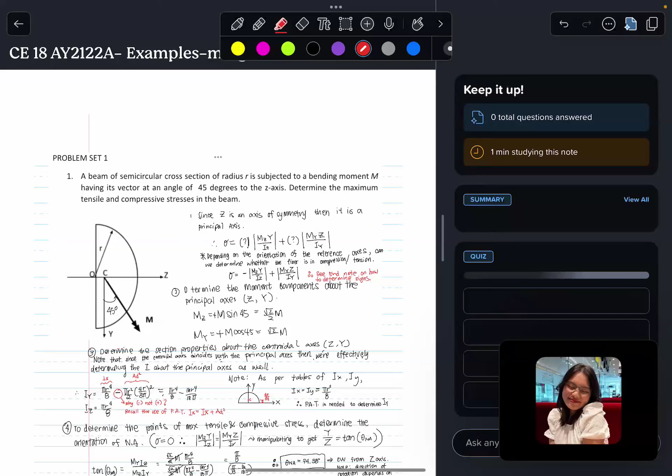What I have here are sets of problems, taken from previous exams and previous problem sets. So let's get started. Yung coverage ng ating long exam involves special topics on flexure, anything that involves bending moment and shear forces—kung paano siya mag-manifest into bending stresses, paano siya mag-manifest into shear stresses. Marami-raming problem ito, let's get straight to it.

For the very first problem, imagine that you have a semicircular cross-section with radius r. Take note, radius r ito, hindi pa natin alam kung ano ba yung radius na ito, so very expression-heavy yung ating magiging exercise dito. Sinabi daw na it is subjected to a bending moment having a vector angle at an angle of 45 degrees with respect to the z-axis. So determine the maximum tensile and compressive stress of the beam.

Kindly look at this, check natin very precisely kung ano yung ating coordinate system dito. Meron tayong y-axis dito and z-axis dito. Kung gagamitin natin yung right-hand rule, yung y being our abscissa, yung z being our ordinate. Kapag kinross mo itong dalawa, y cross z, yung positive x na vector normal to the plane is going away from the page, parang pointing towards you.

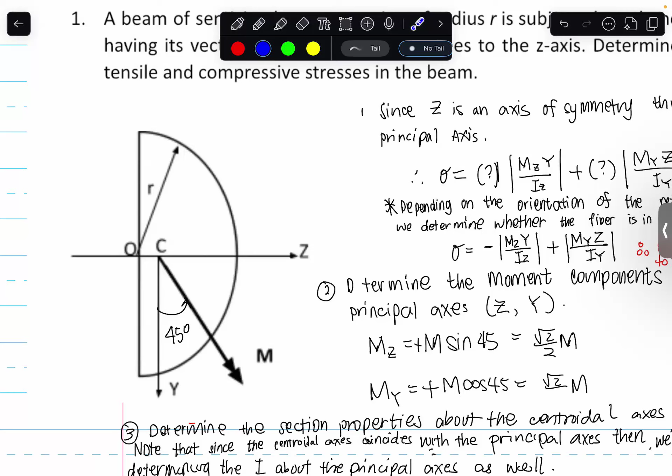Ibig sabihin, yung makukuha nating anything na positive na value would indicate tensile na bending stress siya. Kapag baliktad naman, say ito yung z, ito yung y, magfi-flip yung ating perspective such that yung vector normal to the plane is into the page. Therefore, whatever bending stresses na makuha natin, magfi-flip dapat yung sign, kasi baliktad yung notion ng positive at negative—given na kunwari ito si z, ito si y, going towards the page yung positive na direction. Pero other than that, mabilis lang naman natin itong ma-carry over, hindi naman very particular sa signs ng bending stresses natin. Anyhow, let's deal with the problem.

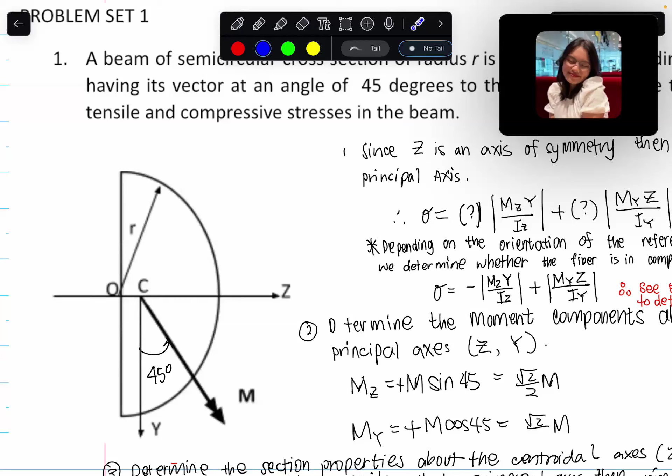So we have a semicircle right here. Magiging concern natin, paano natin makukuha yung IY saka yung IZ, tas should we be getting yung IYZ? Yun yung tatlong questions natin bago tayo deal with unsymmetrical na bending stresses. Pero lucky for us, since z-axis is the axis of symmetry, automatic principal axis na agad siya. So hindi na natin gagamitin yung product of inertia, simply gagamitin natin yung principal moment of inertia along Z, principal moment of inertia along Y.

Again, these are the coordinates ng principal axis—kapag capital letter Y, capital letter Z, kapag capital letter yung subscript, ibig sabihin these are along your principal plane. So depending on the orientation of the reference axis, we determine whether the fiber is in compression or in tension, kailangan lang nating i-check.

Again, yung notion dito is that yung going away from the page, towards us, yun yung positive na bending stress. Paano natin makukuha yung positive na bending stress? Say meron kang moment along Y. Paano tayo arriving at that moment along Y? Kung may moment ka along Y, that is a result of some radial arm along the z-axis.

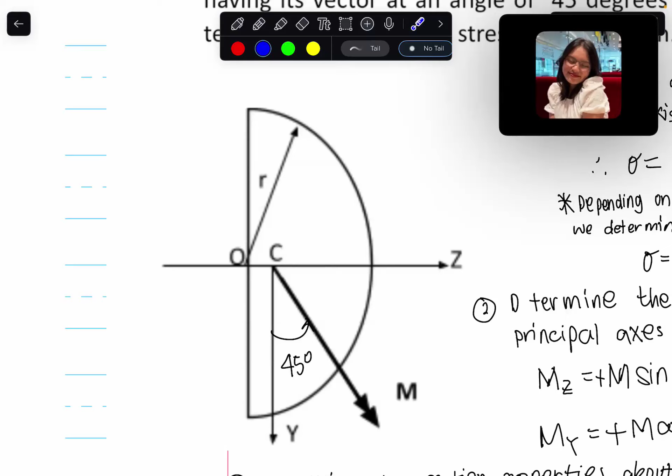Ito yung mahirap kapag online, hindi ma-demonstrate si right hand rule, pero yung right hand rule natin will kinda look like that. Kailangan natin mapakita na if going away from the page, tension siya; if going towards the page, dapat in compression siya. So kailangan nating i-take note, halimbawa going into the page yung direction ng bending stress mo, meron kang moment arm dyan—kindly check yung right hand rule natin. If going towards the page, ito yung moment arm mo, assuming negative yung bending stress going towards the page, yung moment arm mo magiging resultant niya ay yung moment na pagganito.

So that would indicate a negative bending moment, when going away from the page, and you'll have this moment arm right here based on your right hand rule. Lay down your palm along this axis, then raise your fingers on this plane along the positive z-axis. So anything going towards the positive z-axis, when you raise your hand, that becomes your moment arm, then your thumb should be pointing towards the positive y-axis. That would indicate that if you have a positive component along Y of the bending moment, and your moment arm is along the positive Z, you'll have a positive bending stress.

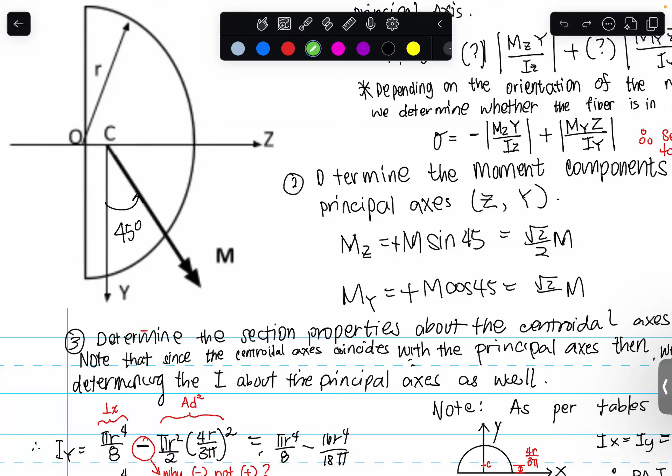Now, another thing, the component along the Z for the bending moment. Say you have a component along Z for the bending moment, like this. Imagine this is your radial arm along this line, but we focus on the positive y-axis. This is your moment arm, lay down the tips of your fingers here. Then try to curl up your hand from that page, your right hand. What you'll realize is the arrow is pointing towards the negative z-axis. So that would indicate that the connotation is negative for m sub z, given that y is positive and z is positive. This combination would result in a negative bending stress.

So that's how you check whether the bending stress is positive or negative, because it will matter when you add these together.

So after determining our equation, you can then decompose it into its component along the principal z-axis. So what you'll have is, if it's 45 degrees from the y-axis, which is your abscissa, to get the component along y, we need the cosine. For the component along z, or the ordinate, we need the sine trigonometric function. So to complete it, this is square root of 2 over 2 m, square root of 2 over 2 m. Both components are positive.

Now, the challenging part is determining our section properties about the centroidal axis. What we have is the formula for the moment of inertia for a semicircle. And here is that formula: pi r raised to 4 over 8.

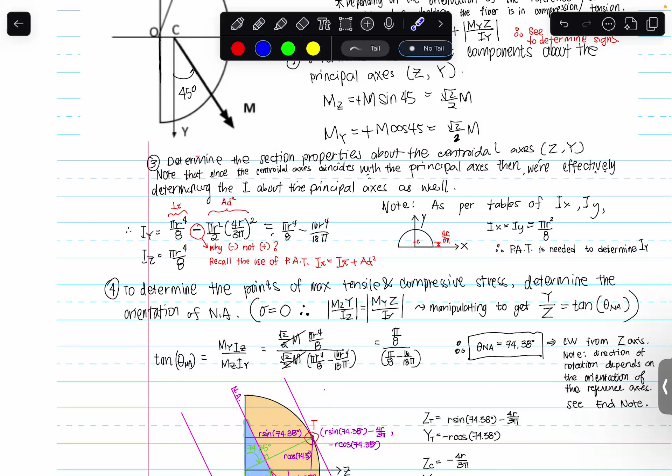So yun yung next natin na SOP. Kung provided na yung ating bending moments, provided na yung ating product of inertia and moments of inertia, you can determine kung saan si neutral axis. Pero lucky for us nga, walang product of inertia.

So we can satisfy ourselves with this formula right here. So meron kang tan of the angle of the neutral axis. Tapos meron kang MYIZ over MZIY. So ano ang meaning nito?

So take note na this is Y over Z. Balikan lang natin. This is Y over Z. So whatever angle na madederive natin dito, it will always be with respect to from z-axis going towards the y-axis if in case na positive siya. Pero if negative siya, ibig sabihin it's going away from the y-axis, yung direction ng angle mo.

So kindly check lang, makukuha natin, plug in lang natin. So meron kang value for my, which is this one right here, for mz, this one right here. So magka-cancel out lang yan. So wala tayong problema. Tapos yung hina-highlight ko rin na r raised to 4.

R raised to 4 yung common factor ng lahat. So pwede mong i-factor out lahat yan. So yung matitira is pi over 8, tas pi over 8 minus 16 over 18 pi. And this will give us, kapag pinlagi natin sa calculator, 74.38.

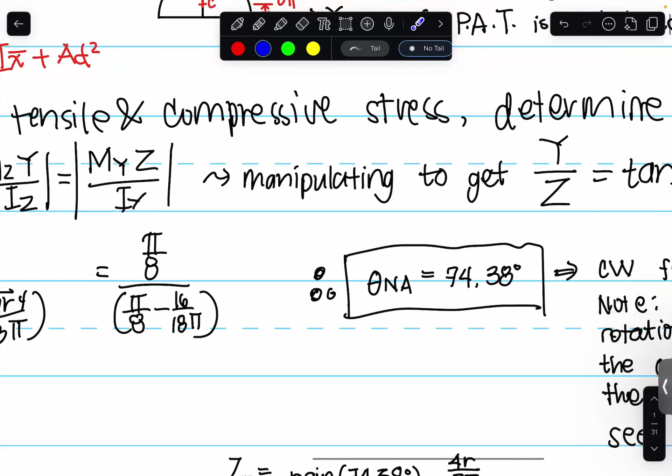So again, yung base kasi sa pagkakasulat natin ng ating equation for the neutral axis, kindly take note na dito siya galing. So meron kang mz over iz

is y, tapos meron kang my over iy times z right here. So kapag ginumble mo yan, you get yung y over z. So yung my, imumultiply mo sa iz, tas yung mz, imumultiply mo sa iy. So kapag kinuha mo yung y over z, you'll be having this equation right here.

So meron ka nito. So again, from z going towards y, if in case na positive yung angle natin. Pero nag-highlight din na bakit clockwise? Nagmukhang clockwise, kasi since si z yung kinonsider natin abscissa dito. Si z yung kinonsider natin abscissa, which is yung denominator. Tapos yung y yung kinonsider natin ordinate, which is this one right here.

So, ibig sabihin lang nun, z cross y, this will give us negative x. So kahit na positive yung makuha mong value rito, that would indicate a clockwise na rotation. So, that's another way to go around this.

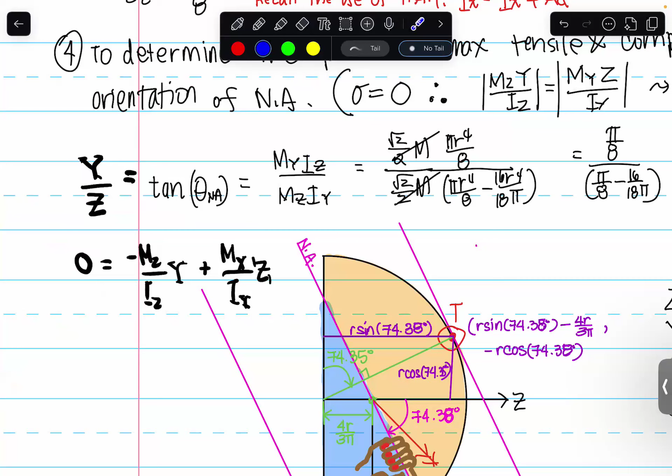So, para lang hindi talaga magkalituhan, if na-encounter nyo itong numerator at saka denominator na term, pa-positive na term from the denominator na axis towards the numerator na axis. Kapag negative, going away from the numerator axis from the denominator axis natin.

So meron tayo ito, 74.38. So again, from the positive z, so ito yung centroid natin, ito yung centroidal axis natin. So from the positive z going towards the positive y, so we have this angle right here. So ito yung ating neutral axis.

After determining yung neutral axis, it's time for us to visually appreciate siguro kung saan ba possible, saan ba yung mga pinakamalalayong fibers natin. So, saan yung pinakamalalayong fibers natin? All you need to do is, kung maganda yung ating drawing, to draw perpendicular lines. Imagine perpendicular lines, imagine now kung saan pinakamalalayo yung ating mga points.

And this is a bit of geometry na part. So, kung may 74.38 ka dyan, tapos we're drawing perpendicular lines. So, meron kang 74.38 dito. Nag-draw ka ng ganyan, that will be perpendicular to this axis. Yun yung sure tayo.

So, kapag nag-draw ka ng 74.38 from the center ng ating quarter circle, perpendicularly siya mag-intersect dun sa neutral axis natin, and you'll arrive at the farthermost fiber. So, through some algebra, on the other hand, ito for sure, ito yung farthermost na compressive fiber natin. All we need to do now is to get yung z at saka yung y coordinates. Since nakuha mo na 74.35 to, so this must be yung z component, kailangan mo kunin yung sine.

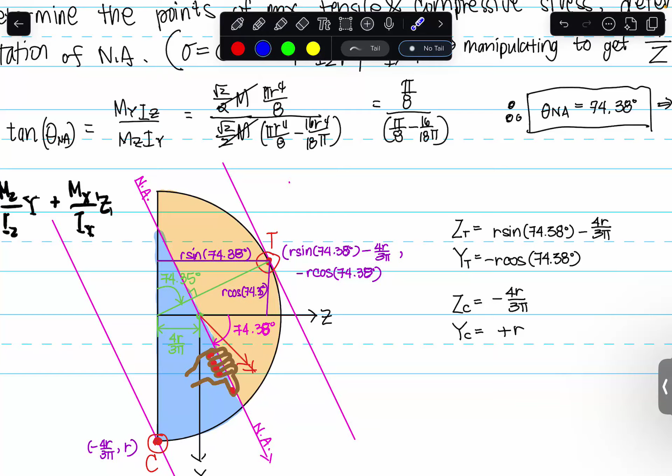Plugging everything in, it's very expression-heavy, so just plug it in as is. You can factor out the r here, including r raised to 4, so they cancel out, leaving r raised to 3. This term vanishes, and m is maintained. This has some value, and this also has some value, so what you factor out is m over r raised to 3, and you get 39.55 mr raised to 3.

On the other hand, if we try it for the compressive fiber, again plug in as is, retaining the signs — don't forget the signs. Again, m over r raised to 3 is the term we factor out. This term vanishes, and what you'll have is negative 4.535 mr raised to 3. So we're done with that.

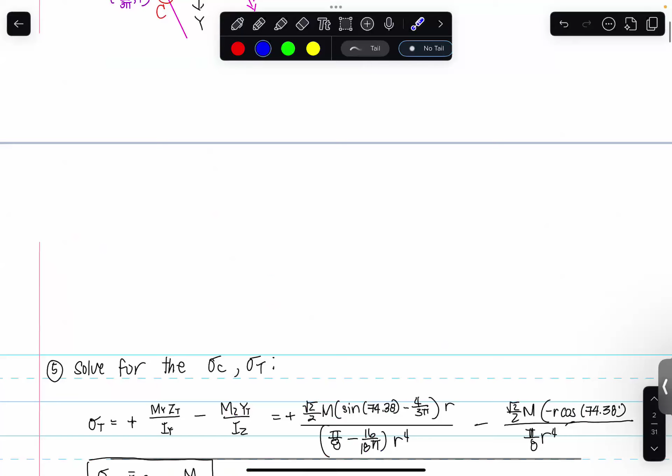That was when the centroidal moment of inertia is involved. But we can also go back to using our original reference axis. So again, this is our reference axis. If we try this using the biaxial bending formula—

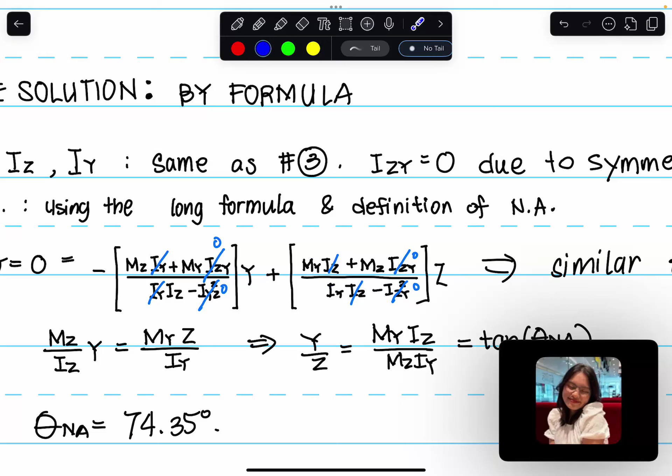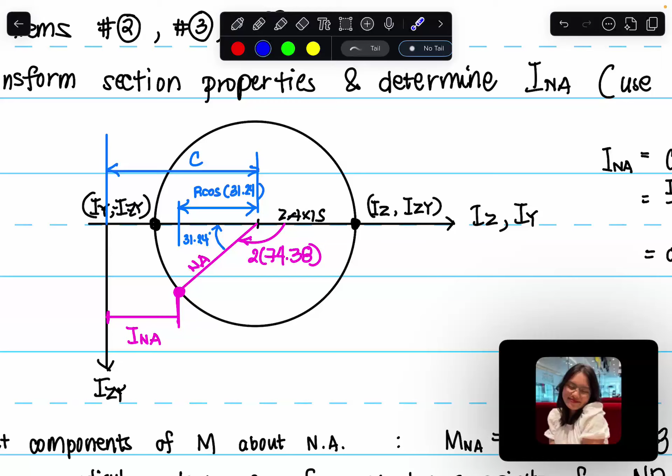So if we want to get the neutral axis, if we do it in terms of components it gets a bit messy, but you'll still arrive at the same point. What we did here was convert from our set of principal moments of inertia into terms of coordinates along the neutral axis.

What we took in particular is what's called I NA — the I along the neutral axis. Then you just take the components along the NA, so we have M cosine of 74.38 minus 45 degrees. That's the component along the neutral axis.

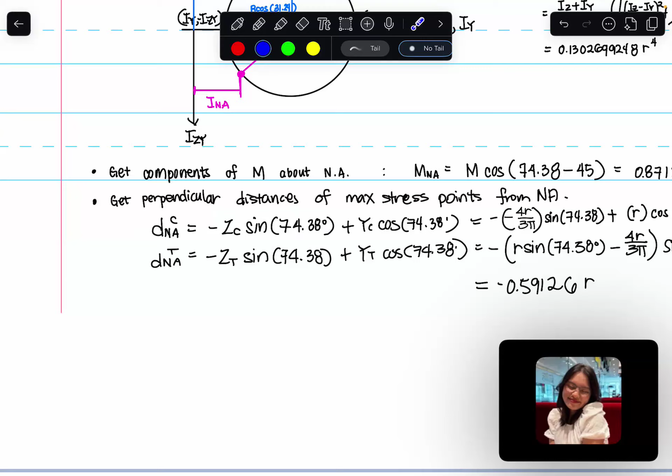So what you do next is convert what the distance from the neutral axis is for the farthest fiber under compression — this is our transformation equation. We just converted our coordinates from this into this, in terms of this. This one, we applied coordinate transformation.

So you end up with this: z sub c times — this is our z multiplied by sine, plus y times cosine. Similarly, we do the same thing for the tension side.

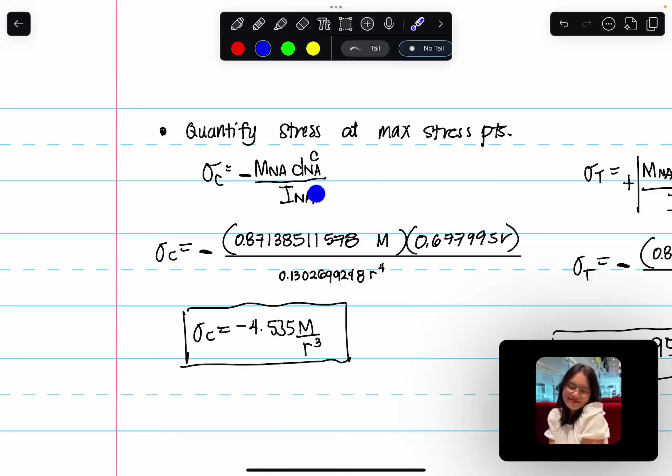So, plugging everything in. So, meron ka nito, tapos meron ka nito. I-plug in mo lang sa M over I NA. So ito yung makukuha mo. My, ito yung M, ito yung Y over I and A. Ito yung M, ito yung Y, ito yung I NA natin. Plug in mo lang lahat. Supposedly, it will loop back to whatever you are getting from the original axis.

Pero again, nakita nyo na ang daming variety ng method na pwedeng gawin, via the principal axis, o pwede mong gawin sa original na axis natin, o pwede mo rin gawin using yung coordinates along the neutral axis. So i-convert mo lang everything in terms of the neutral axis and you'll still get the same set of answers. May questions ba dito?

Questions? Question? Going once? Going twice? Yep.

Yep, ask mo. Ano yung tanong doon sa symmetry? Yung sa symmetry, as long as yung isa sa axis mo, halimbawa yung x-axis mo or yung y-axis mo, is an axis of symmetry, automatic, yung product of inertia ay equal to 0.

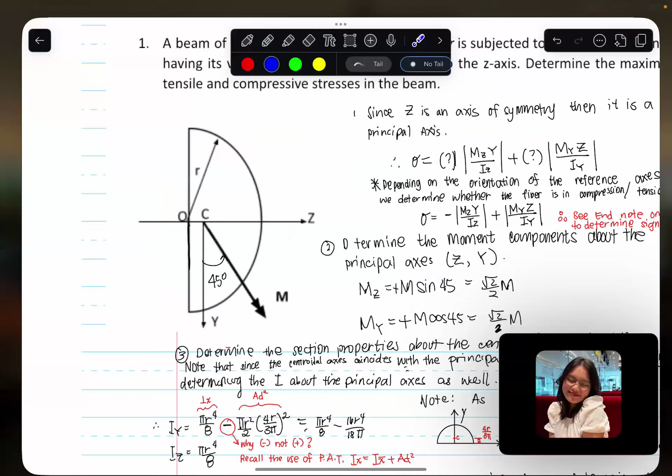Or, another thing, if not very apparent yung ating axis of symmetry, kasi dito very apparent kaya ang bilis hanapan. Kailangan mong kunin yung principal plane, and only if you determine yung principal plane, will you find that particular plane, kahit na hindi siya mukhang axis of symmetry, kung saan nagzi-zero yung iyong product of inertia.

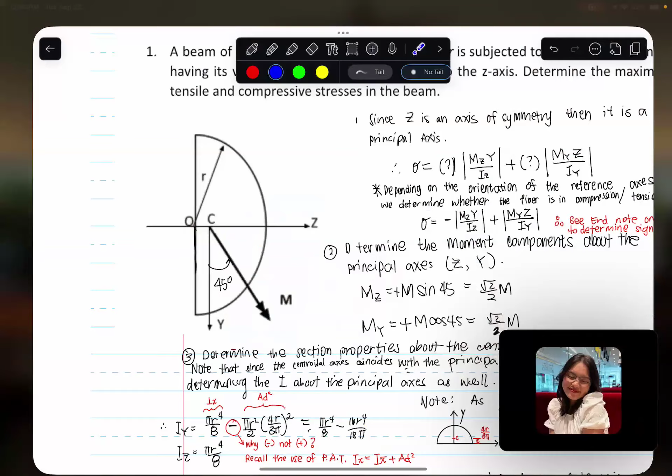Okay, so I hope makakapa natin to just right before the exam. Kasi nung chinek ko, madali lang naman yung part, medyo kaya naman to, mamamanage nyo yung lalabas sa exam, as long as kabisado nyo yung bawat step, even yung pagkuha ng product of inertia.

So para ma-practice pa tayo sa product of inertia. Wala nang tanong? Okay? Ay okay. Thank you, Ashley.

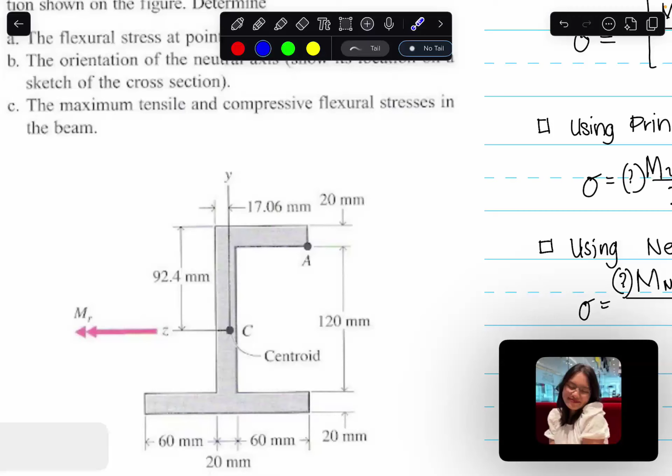So meron tayong beam. Yung beam natin, obviously, very unsymmetrical siya, so walang axis of symmetry. So mahirapan tayo sa pagkuha, bago tayo makakuha ng bending stresses, kailangan natin makuha si... mag-admit lang tayo, kailangan natin makuha si moment of inertia at saka si product of inertia.

So sabi daw, kung meron kang moment, just given yung magnitude na 20 kilonewton meters, pinapakuha sa atin yung flexural stress at point A. So medyo mahaba-haba na journey to, at least, pero makikita natin yung sequence on how we are dealing with the solution.

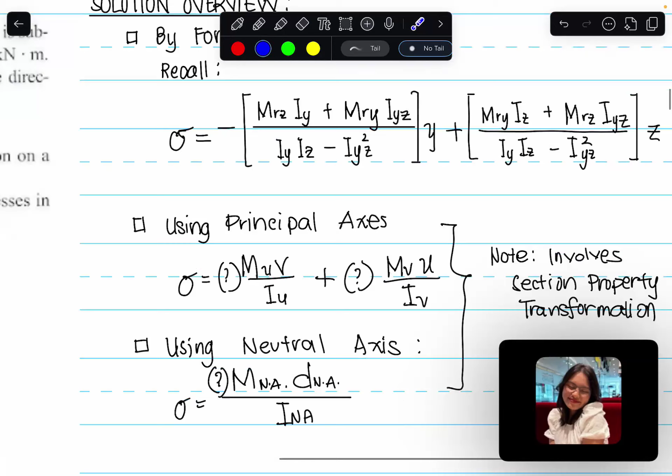So to recall, ito yung formula na gagamitin natin in the end. Provided yung ating bending moment broken down into its orthogonal, so along the y and along the z, then kailangan din natin si IY, si IYZ, at saka si IZ para makumpleto natin to along with the coordinates. And alternatively, natutunan natin just right now, kung principal axis, pwedeng ito, o kung neutral axis, pwedeng diretso na doon.

Look lang. So kung gagawin natin via formula, kailangan natin ma-determine yung cross-section properties, kailangan natin makuha yung moment components, makuha yung coordinates. Lahat yon para dito. Plug and play, makukuha natin siya. So kailangan nating makuha yung section properties.

Imagine that you then broke down yung ating cross-section into these three shapes. You have a red na rectangular shape na 20 by 80 millimeter. So again, kaya 80, 60, at saka 20. So 20 by 80. Tapos meron ka pang 120, so ito na yung hinighlight ng dimension line by 20 millimeter. Tapos meron kang 20, yung kapal, tapos meron kang 60 plus 20 plus 60, 140 millimeter.

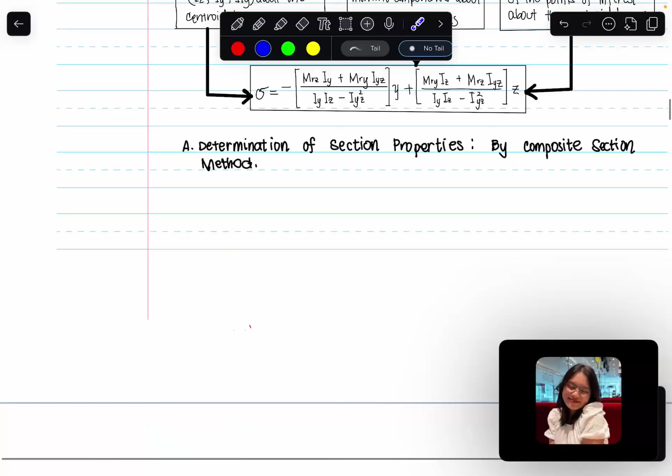So ito yung tatlo mong area. And maganda, para hindi tayo magkaligawan, kailangan natin gawin itong table na to. At kadalasan, hindi na tayo pinapahirapan na pinapahanap pa kung nasan yung centroid natin. So yung centroid provided na, scroll ko lang pataas para maano natin. Provided na yung location ng centroid na 92.4 millimeters from the extreme top, yung top na fiber natin.

And yung location naman niya along, yung centroid naman niya along the z-axis ay located 17.06 millimeters from this fiber right here. So alam na natin, na-set up na natin yung coordinates. Alam mo na rin yung location ng centroid. We can then determine ano yung kailangan mong i-translate from each of the respective shape in order to get to the centroid.

So meron kang DZ, na kung ito yung reference axis natin, so kalahati ng 80 ay 40. Yung 40 na to, ima-minus natin sa 17.06. Tapos yung DY naman natin, ito ay located, so meron kang 92.4 dito. So ibabawas mo lang, kasi since ito yung reference, ibabawas mo lang yung kalahati nito, kasi ito yung location ng centroid niya along the y-axis.

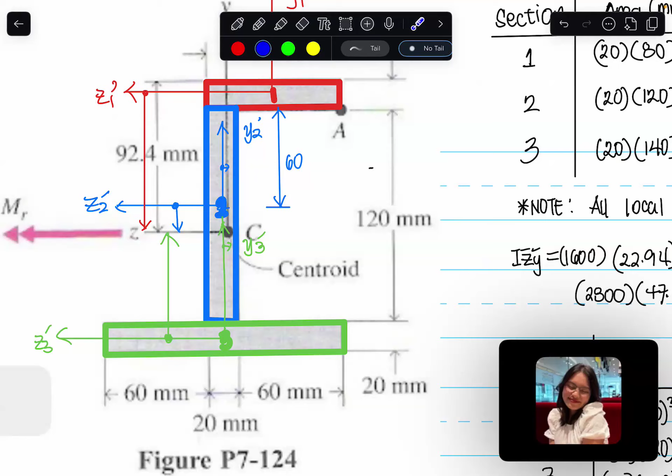So meron kang 92.4 minus 10. Ganun din ang gagawin mo sa blue. Yung location ng centroid niya along the z is 10, and yung sa centroid is 17.06. So take note, yung location ng centroid minus yung na-identify mo na location ng centroid ng shape, tas minus yung centroid ng buong cross-section. So ganun palagi - centroid, yun yung palagi mong ima-minus.

Ganun din dito. So meron kang 92.4. Bawas natin yung 20, tapos yung kalahati nito, itong 92.4. This is 60, tapos dadagdag mo yung 20. So meron ka nito. Ima-minus mo si 92.4, makukuha mo yung location ng centroid niya, na si 57.6. Ganun din yung magiging treatment mo along the z. Meron ka nito, along the y, meron ka nito.

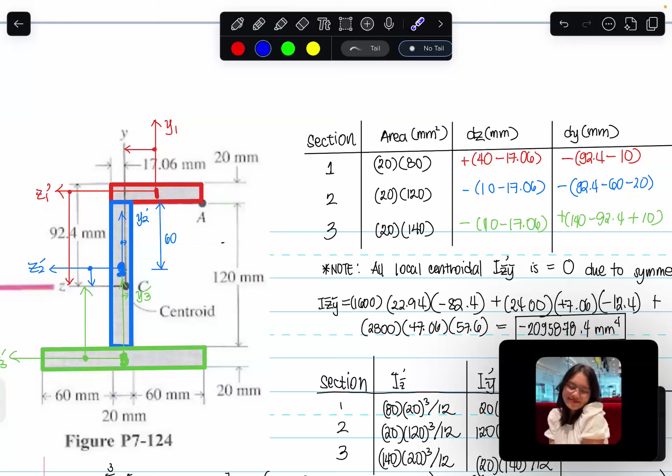So himayin lang natin ng n. Kailangan mo makuha yung bawat coordinate ng centroid ng bawat shape with respect to, if you were to consider na yung centroid ng buong cross-section mo yung origin. Only then, makukuha natin yung product of inertia, knowing na since lahat to ay rectangle, yung centroidal product of inertia niya ay equal to 0. So all you need to do is to conduct parallel axis theorem on each shape.

So meron kang IZY is equals to A times D sub Z times D sub Y. So this is for this. Ito, papasok siya dito. Papasok siya dito. So ito, papasok siya dito. And you'll be getting -2,095,878.4 millimeter raised to 4.

Tapos, on the same manner din, kukunin mo rin si IZ. Wait lang ha.

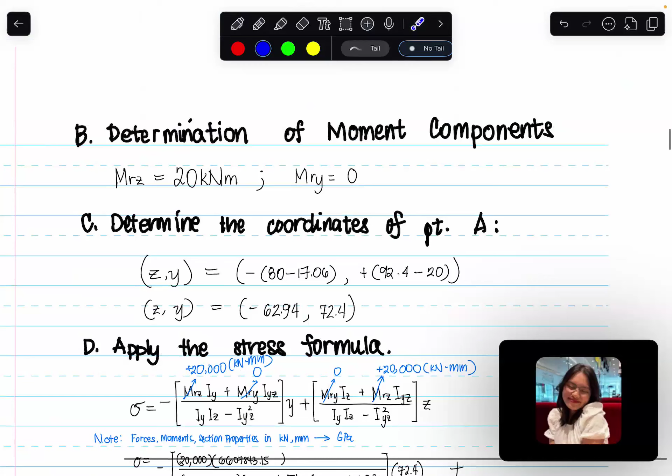Lahanin natin yung 20 kilonewton meters na yon is towards the positive Z. So if we're going to consider consistency ng units, itong 20 kilonewton meters na to, since yung ating moment of inertia ay naka-millimeters, might as well convert it to millimeter na rin down the line. So pwede mong sabihin na 20,000 kilonewton millimeter. Tapos yung coordinates ng point A, take note lang natin na ito si point A.

So meron siyang coordinate na si point A ay pwede natin sabihin na 92.4 minus 20. Yun yung Y coordinate niya. Yung Z coordinate naman niya, if this is 80 minus 17.06. So balikan lang natin - so 80 minus 17.06 is meron kang 92.4 minus 20.

So meron kang set ng Z at saka Y na formula. So again, yung MZ na naman, yung may negative dito, tapos katandem niya si Y. Yung MY, yung wala. So alam natin i-set up to using yung right hand rule. So meron kang MY and that - you simply plug in everything that you have computed so far, lahat-lahat.

So kagandahan ay walang MY, so hindi ka mahirapan dito. So wala na ito, tapos wala na rin ito. Ito na lang, itong dalawa na lang yung poproblemahin natin. Pati yung denominator, you plug everything in, you'll get point.

So take note, makukuha mo numerical value dito is kilonewton over millimeter squared or gigapascal. So kung gusto mong i-convert to megapascal, make the necessary conversions. Or in the first place, pwede mo nang gawin to na 20 million para diretsong megapascal na yung ating sagot.

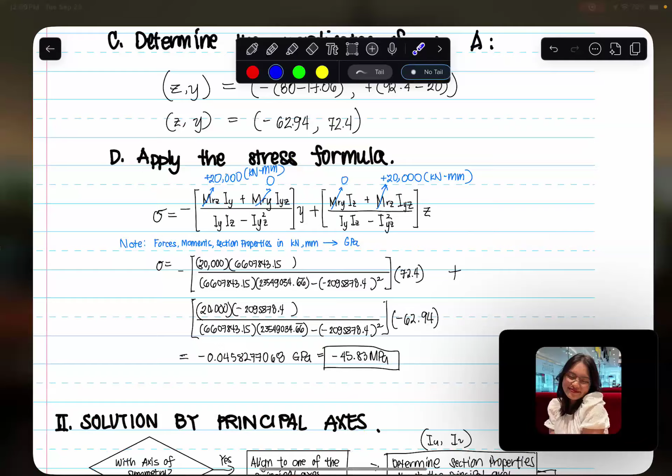Question: Sir, bakit 12.4 yung dy? Di ba nasa 12.4 yung rectangle 2? Bakit 12.4 yung dy? Asan ba?

So along the Y, that's the translation. So this 12.4 came from 80 minus 92.4. This one right here is 80, up to the middle of this. So 60 plus 20 is 80. This is the location of the centroid of area 2. But this is your centroid, so you need to... and you know this is 92.4, so this distance is 12.4. I hope that clarifies it.

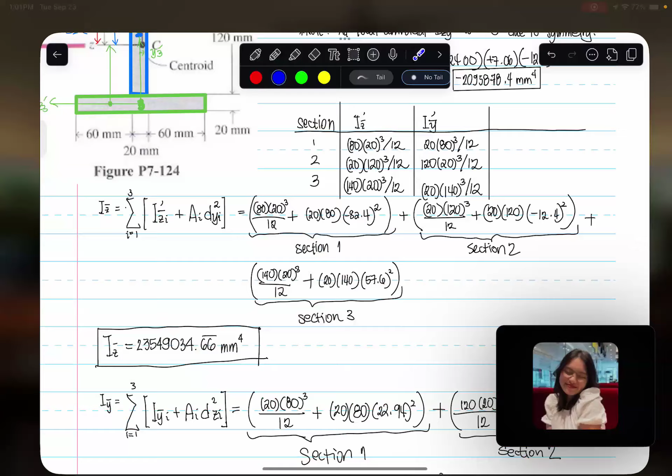Why is it negative? Solving for IZY. Why negative? Kindly take note, this is our set of axes. This is our set of axes. This is our positive Y, this is our positive Z. That would only indicate that it's here, and here, where most of our area is.

So take note, this is Y, this is Z. So this first quadrant has positive product of inertia. This quadrant has positive product of inertia. This quadrant has negative product of inertia. This quadrant has negative product of inertia. So by visual inspection, these two quadrants have more area. As a result, our expectation is that our product of inertia will turn out negative if we were to compute this.

I hope that answers the question there. Sure, regarding the part about product of inertia, centroidal IYZ is equal to 0. Is it prime or not? It's not prime. Wait, let me clarify - it's not prime, it's unprime.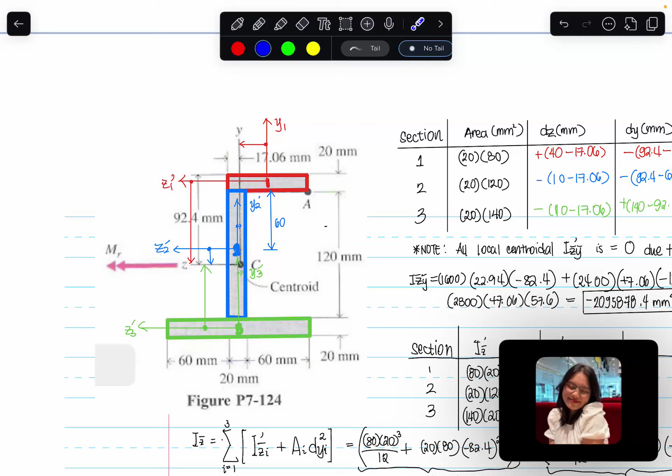That just means this Y and Z axis are not the principal axis. Therefore, the product of inertia appears as a non-zero value. Only if we transform it towards the principal axis, so we find the principal axis, only then we are setting up our set of prime axes, and with IZY prime, this will become equal to 0. So kindly take note, these are not prime but rather the centroidal axis.

So it's like we identified the centroidal axis here. This is Y bar, this is Z bar. So it's unprime. We took the product of inertia from that set of axis. Any more questions?

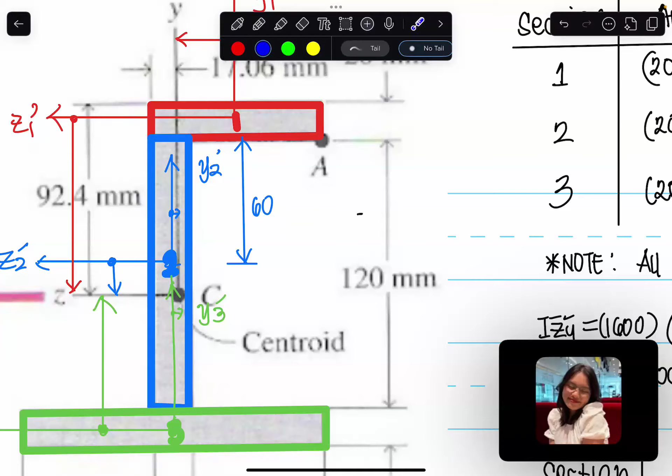Yes, if ours is purely rectangular. Yes, for the prime, this is local to each shape. And it happens that these shapes are symmetrical on their own set of axes, local axis. So the product of inertia of this is 0, of this is 0, the centroidal product of inertia of this is 0, of this is 0, of this is 0. And what would remain is the parallel axis theorem, because you're moving from their respective local axis towards the local axis of our whole section, which is at the centroid.

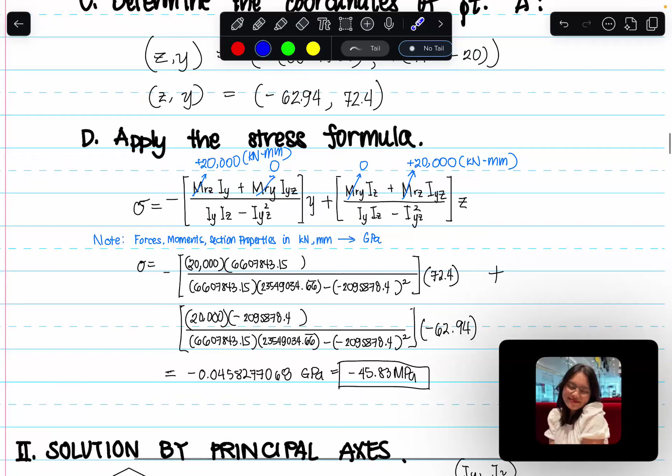Questions? Yes. Take note, in the exam they won't give you very complicated shapes for product of inertia. So at the very most, this is what they'll ask you to do. Provided the product of inertia, provided the coordinates, provided the components of our moment, you can use the stress formula, the long formula, in order for you to get negative 45.83.

If we do it in terms of the principal axis, you need to first check: are you on the axis of symmetry? If yes, there's no more problem, because one is already aligned with our principal axis. The section properties you should get are already the principal moments of inertia. But just like what we determined earlier, this is not our principal axis because our product of inertia appeared as a non-zero value.

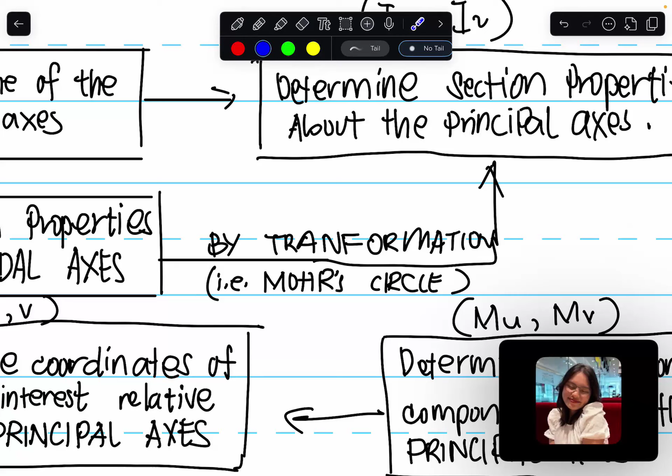And to do this now, we need the transformation equation. You can use the long transformation equations from module 1, or you can do a Mohr's circle. So you just do a Mohr's circle and conduct the transformation in a similar manner.

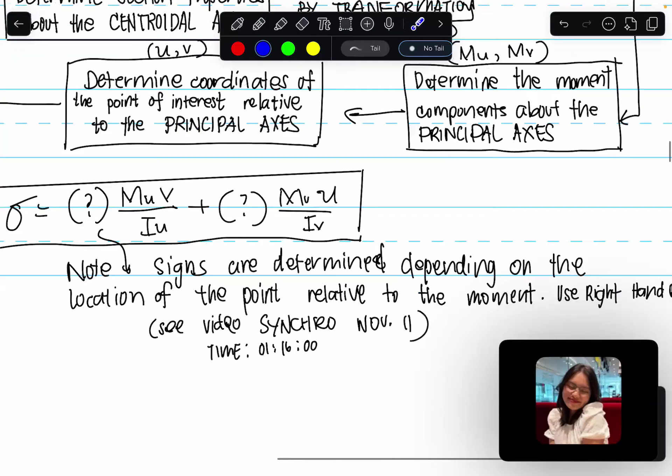Whatever step we get, we'll get the section properties about our principal axis. But since our reference plane also changed towards the principal axis, our moment vector also needs to be resolved into its orthogonal components about the principal axis. Even our coordinates need to be translated or rotated, performing a rotational transformation so that the coordinates we get are in terms of the principal axis. So again, we determine our signs from that right-hand rule I demonstrated to you earlier. After that, you can do the rest of the solution.

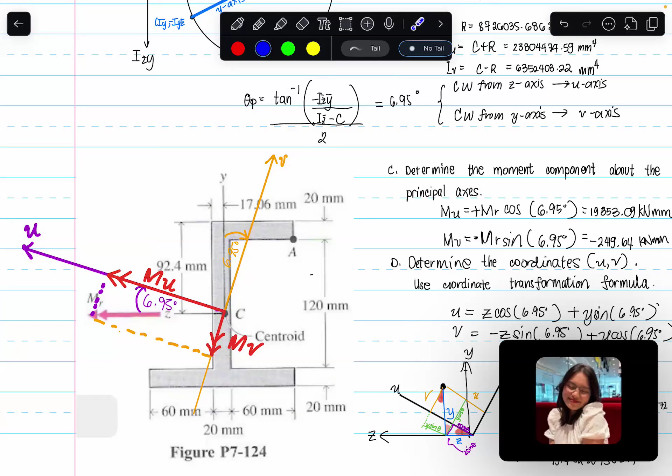Into its U and V na components, so you simply do this, and you'll get MU at saka yung MV. Yung coordinates, medyo tricky pa ng konti. Kailangan natin gawan ng coordinate transformation.

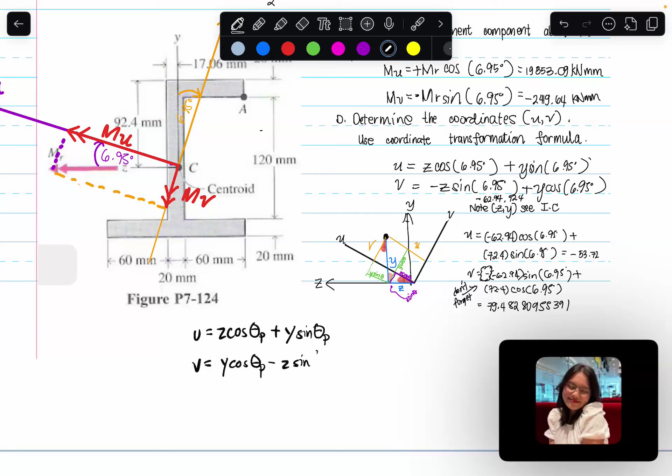So wag nating kalimutan yung ating coordinate transformation. Sulat ko na lang para hindi nyo makalimutan. So meron tayong u is equals to z cosine theta p plus y sine theta p. Yung v natin is y cosine theta p minus z sine theta p, which yung nag-reflect dito. So meron na to, and what you'll get is this 53.72 at saka 79.48 as your coordinates.

You simply plug everything in to your stress formula. So again, isipin mo ulit, right-hand rule. Yung right-hand rule natin, kapag going towards the page, yung direction, compression. Or kapag nag-close na yung kamay mo, para magawa yung moment arm na yun, so dapat compression siya, yung kalalabasan.

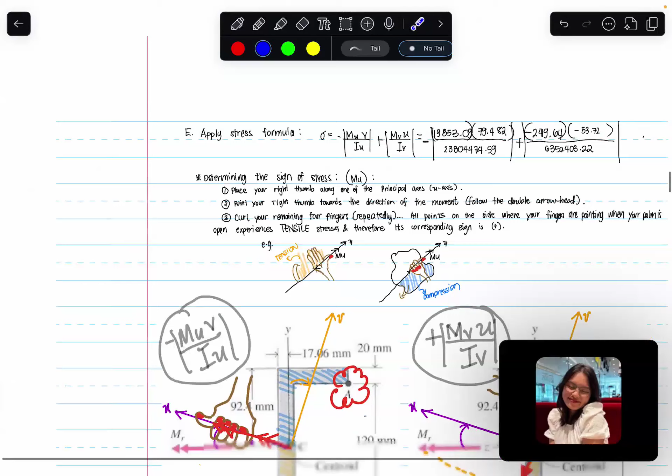So para ma-verify, yan ay magbibigay kung along the negative na v-axis yung moment arm natin, then away from the page, dapat magka-clasp yung hand natin with the thumb pointing towards the positive u-axis. Tapos ganun din dito sa V.

So kung i-check mo din naman, kung going towards the V yung direction, assume mo muna na positive yung bending moment na kinokos niya. So moment along V, so dito siya, ito yung direction niya. Pag nilay down mo yung thumb mo na nakaturo towards the positive V, then nilay down mo yung palm mo and your fingers along this axis right here towards the positive U. Pag kinalas mo yung finger mo, so going away from the page, therefore positive yung relationship ni bending stress doon at saka ni moment along the V.

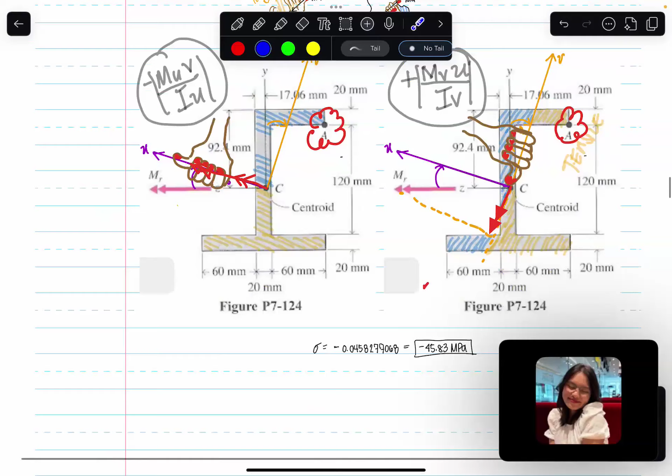Nataon lang na for this regard ay baliktad, kasi yung component along the V mo ay pointing towards down. You plug everything in and you'll still arrive at 45.83 megapascal.

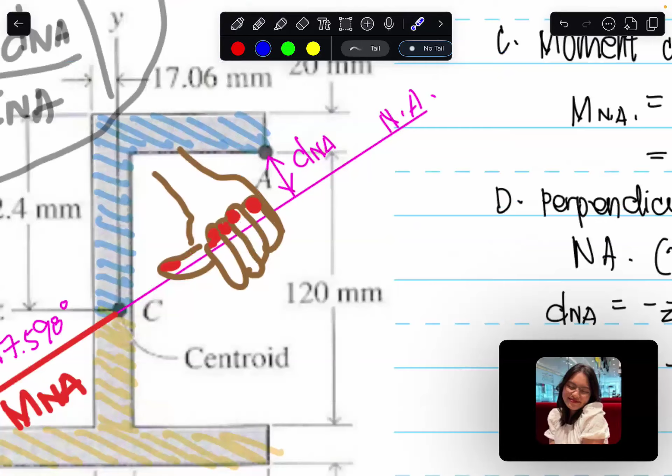So, converting, just find where the neutral axis is, you transform the reference axis towards the neutral axis. You simply get the moment component along the neutral axis, plus the perpendicular distance, and you can simply use M y over I_NA.

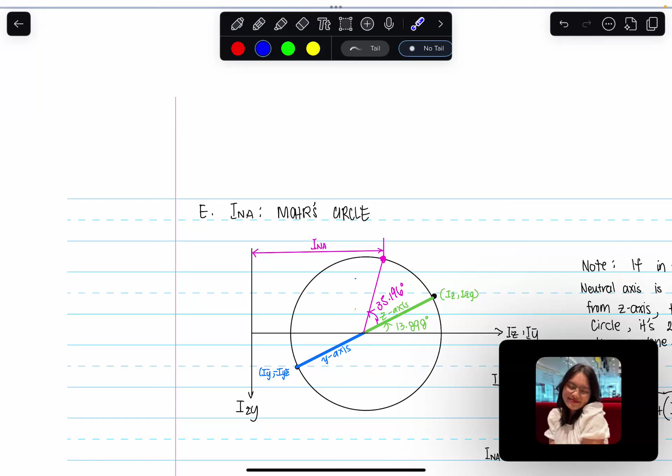So from this axis right here, you need counterclockwise twice that angle to get the radial arm that will give us the set of I_Y, I_Z, and I_YZ. But in this manner, since I already got 35.196 and 13.898, I add the two, multiply by the cosine of that angle, multiply by R, then add C, and I'll be getting this.

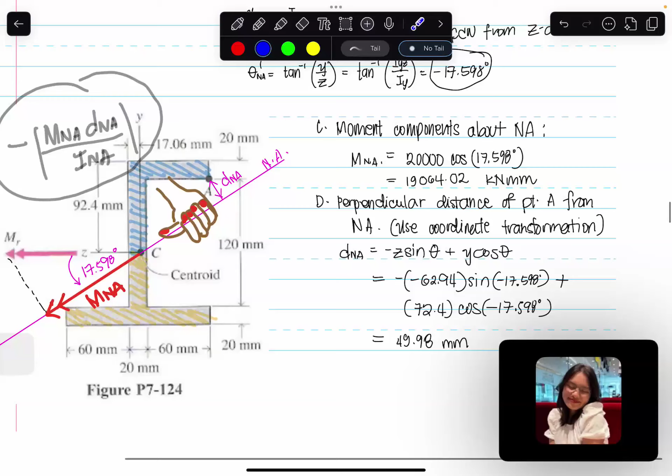So I just need to get this. So when I get it, you'll simply use this formula knowing the location, the angle, 17.598, negative 17.598, and we'll get 49.98 millimeters.

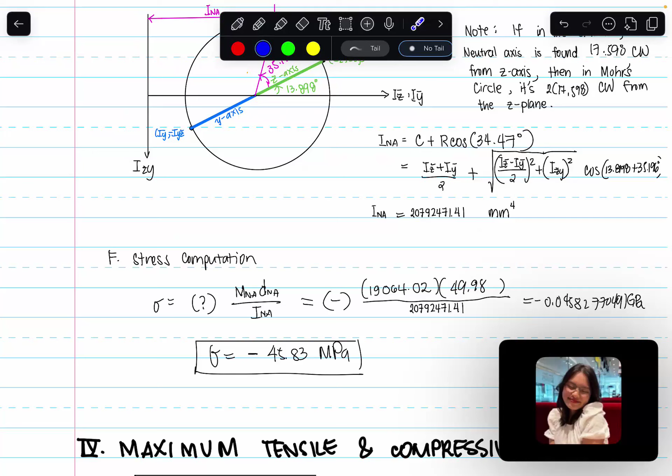So when you do it using the Mohr circle, then when you plug in M y over I_NA, the M along the neutral axis, the perpendicular distance, and our I_NA, you'll still be able to get our answer.

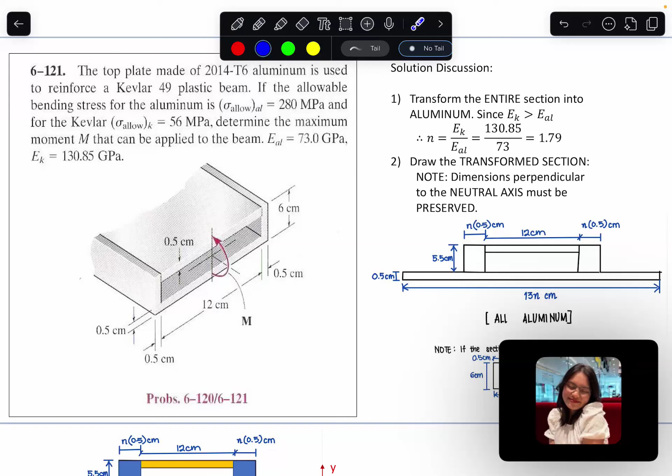So, provided these are the coordinates, your Kevlar, your aluminum is here. This is the aluminum. This is our Kevlar. This is your bending moment. So the direction of the moment arm, the moment vector, is like this, the direction.

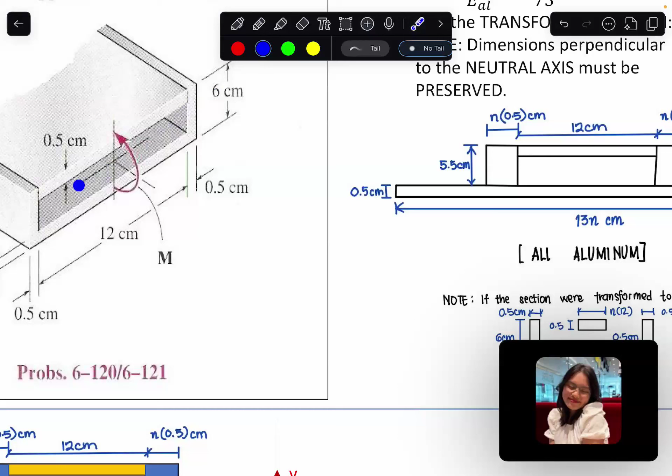So, this is the direction. And considering that our cross-section is symmetrical, the aspect you'll change or transform will only be parallel to this axis right here. What's parallel to this axis? This thickness, this thickness, this length.

So, with the transformation factor being equal to 1.79, the 0.5 cm, multiply it by n. The 0.5 cm, multiply by n. Then the 13 cm, multiply by n. That's what results as the transformed cross-section.

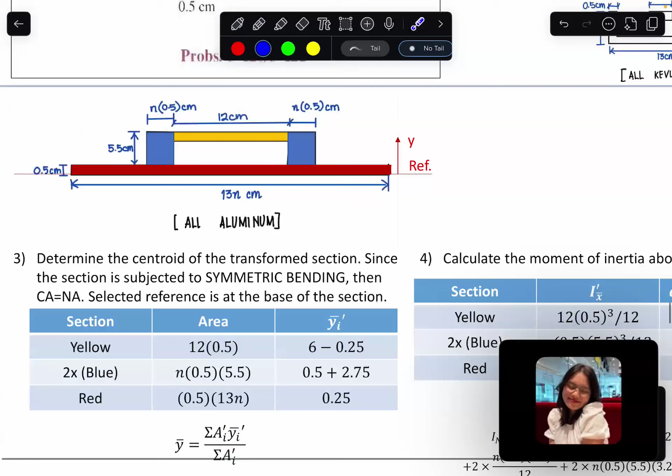So, we are presented with a transformed cross-section that is all aluminum. Find the centroid. Always, find the centroid first. Once you find the centroid, only then will you be able to compute the neutral axis moment of inertia.

So, you have y equal to 2.525, knowing each area. You use the bottommost as your reference. So, for the red, you have half of 0.5, which is 0.25. Then, for these ones right here, you have half of 5.5, which is 2.75. Add that to 0.5, so you have this.

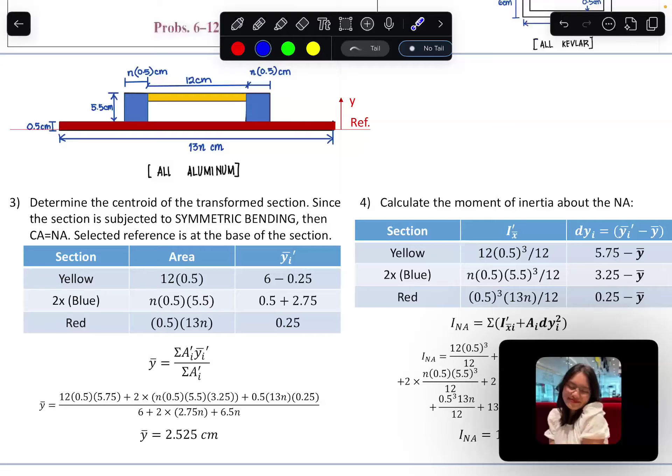So plug everything in, you have 2.525 centimeters as your location of the centroid, which you'll use for your parallel axis theorem and your centroidal moment of inertia to get I along the neutral axis.

And once we've done that, we just need to check, be mindful whether it's originally aluminum or originally Kevlar. We made it all aluminum. That means whatever stress we're evaluating along this shape, there should be no transformation factor in the bending moment formula. But for the Kevlar, since you converted it to aluminum, you need to apply the transformation factor when you plug it in.

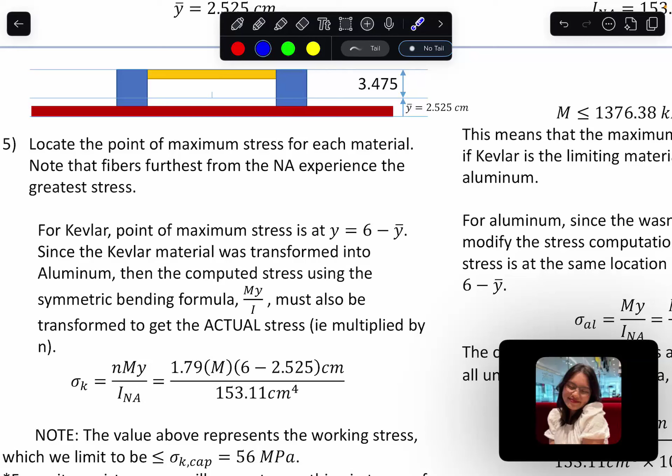Ang katangi-tanging missing dito, given kasi na 56 MPa. So given na 56 ito, known ito, known ito, known ito, missing yung M. So hahanapin natin kung anong value yung M niya. So for this to satisfy yung conditions na ito, kailangan yung maximum bending moment mo should be at least, at most 1.38 kilonewton meters.

For the aluminum, if we were to check kung mag-yield ba si aluminum, you apply the same formula, pero since all aluminum na siya, no need for the transformation factor, and you'll be able to get 12.34 kilonewton meters. And since ang tinatanong is yung maximum allowable, para ma-reach to, na-violate mo na yung allowable for the Kevlar. So therefore, yung Kevlar yung mag-govern, yung mas critical. So, ang i-report mo is 1.38.

Questions? Wala pa? Oh, third question, hypothetically.

If hindi po siya hollow sa loob, and yung loob po is full aluminum and yung surrounding material naman is Kevlar, how po yung transformation, yung transform na section? Sige.

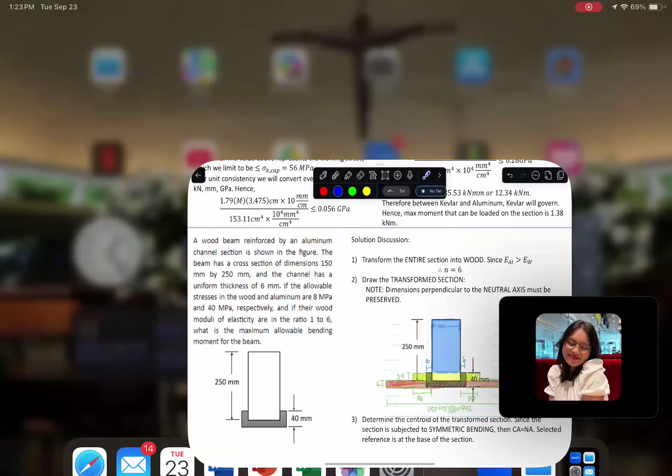Interesting question. So, carry over ko lang. Sabi based from Ashley's question, if for example ito yung Kevlar natin, then sabi punong-puno daw ng aluminum tong nasa loob, kung i-convert mo to all aluminum yan, yung aluminum ma-maintain na ganyan.

Pero yung Kevlar mo ay mag-expand by some fraction. Ganun pa din siya. So may filling pa din sa gitna.

Yung interesting is kung i-all Kevlar natin. Kung i-all Kevlar natin, ganito yung magiging itsura niya. Tapos, you apply the same procedure, hanapin mo kung nasaan si neutral axis or si centroidal axis. So, kung nasaan siya, hanapin mo lang, dito, hanapin mo lang kung nasaan siya or dito rin naman kung nasaan siya. Pareho lang dapat yung makukuha mo.

Either way. So, walang magbabago sa makukuha mo na centroid either if all aluminum or if all Kevlar. Pareho pa lang kalalabasan. Pero yung makukuha mo na INA dito, sa all aluminum, iba dun sa INA na makukuha mo kung all Kevlar siya.

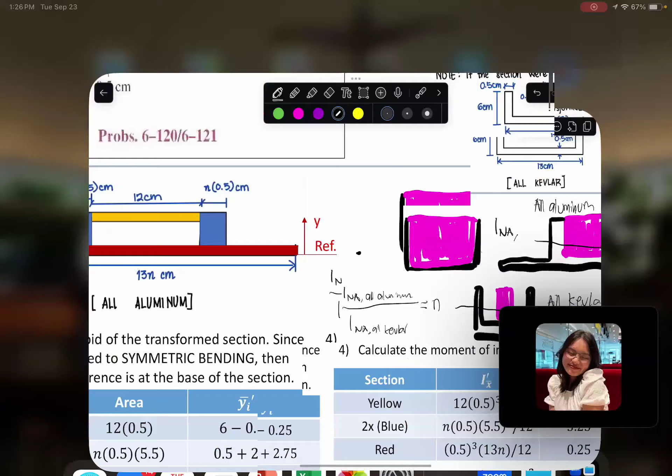Okay, questions pa? So paano pagbaliktad material, sir, tapos may overlap sa area, tapos mako-convert yung material? Ko-consider pa rin ba yung overlapping area?

Yes, i-consider pa rin. So, yung na-bring up naman ni Clyde ay ganito. Ano daw na instead na si Kevlar yung naka-envelop kay aluminum, si aluminum yung naka-envelop kay Kevlar. Let us take some time to draw this.

So your cross-section will kinda look like this. So ito yung Kevlar, ito yung aluminum. Kagandahan dito, ay pwede mo nang i-anticipate in advance. Pwede na, okay, this is a composite shape. I can decompose this to this shape right here.

So i-highlight, I'll put different highlight. So merong shape ako dito. Meron akong shape dito. Tapos meron akong shape dito. So ito, gawin ko ng pula para magpula. Green para may iba naman. So we have 4 distinct shapes.

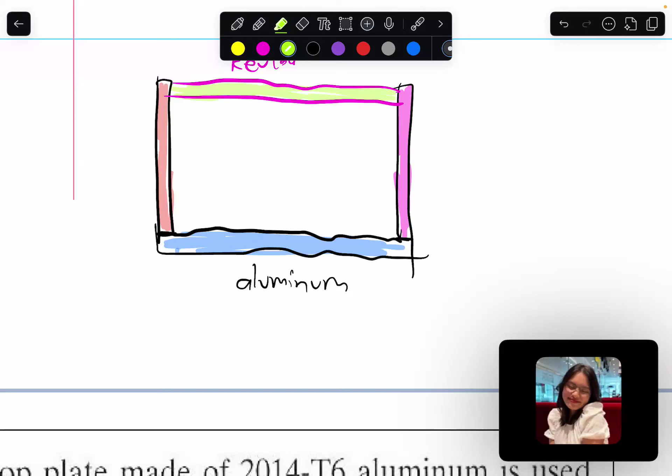Lagay ko lang na this one right here has some length. So lagyan ko lang B Kevlar. It's right here. Yung magiging itsura ng transform shape niyan, if gagawin mo na all aluminum siya,

ang si Kevlar mag-expand. Kahit na mausog yung dalawang mong shape, wala namang problema. Mag-expand si Kevlar ng ganyan, tapos si aluminum nakaganto, si aluminum nakaganto, then yung original na aluminum mo, ganito pa din. So ganun lang yung nangyari sa cross-section.

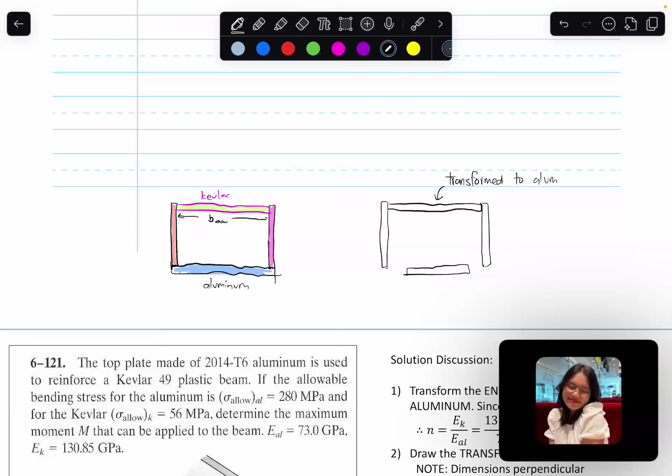Ito yung tinransform mo. Transform to aluminum. So kahit ganito yung shape mo. So ito ngayon ay magiging N times B Kevlar. Pero ito, hindi nagbago yung thickness, just like in the original. Hindi rin nagbago yung thickness nito, just like in the original. Kahit na nausog siya, okay lang.

As long as, take note, na dito pa din yung bending moment mo. So kung meron kang moment vector, dapat yung manner ng transformation mo will be perpendicular to that moment vector. Always. So ganoon kapag baliktad yung material. I hope nasagot yun, Clyde.

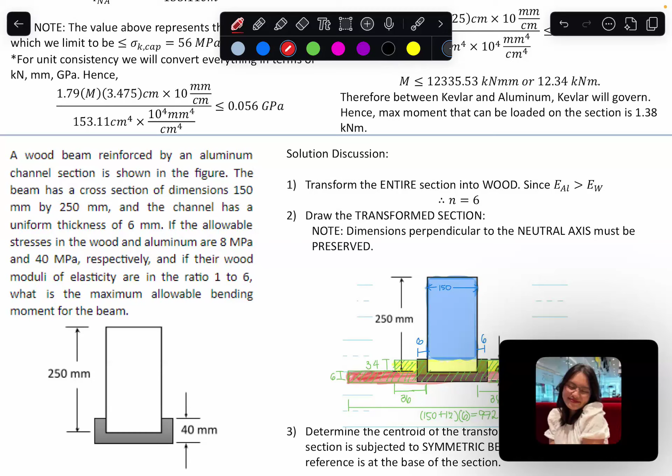Let's try another one quickly before we move to the next topic. So you have a wood beam with an aluminum channel shown in the figure, with provided dimensions, allowable stresses, and the ratio of moduli of elasticity, 1:6.

Since N is equal to 6, we convert this composite cross-section into all wood. So what happens to the wood shown in gray is it will transform by a factor of N, which is equal to 6.

The thickness is given as 6 millimeters, so our uniform thickness is 6 millimeters, making this 6 millimeters. The transformation becomes 6 times N, so this becomes 36.

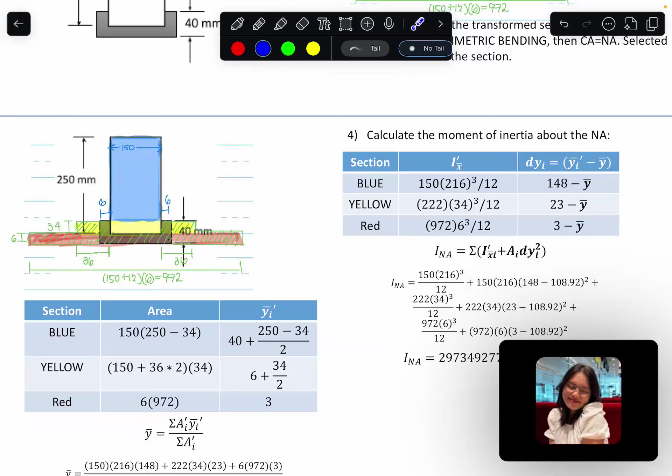So the part at the bottom will transform and becomes 972. Once you get the transformed section, you can then search for the location of the centroid, then compute the moment of inertia at the neutral axis, which coincidentally is your centroidal axis.

Then let's find where the maximum is for the wood and for the aluminum. The wood is in white, the aluminum is in gray - that's the one we transformed to all wood. Let me clarify, so let's find that.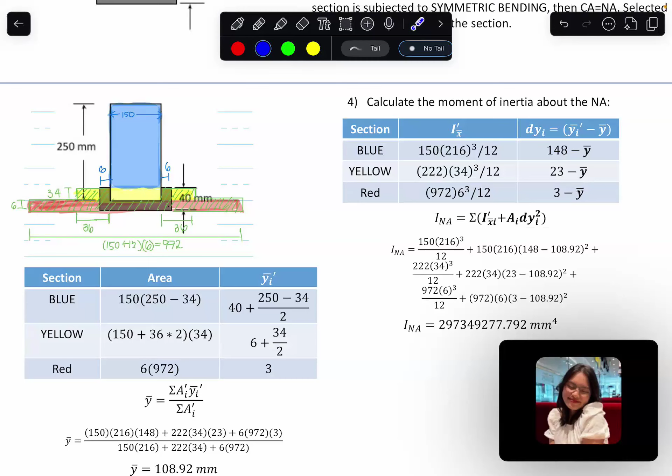If this is our wood, and here is our neutral axis, this is the farthermost fiber of wood, and this is the farthermost fiber of aluminum. So we have that information for the aluminum - let's plug in and evaluate from the topmost fiber and from the bottommost fiber.

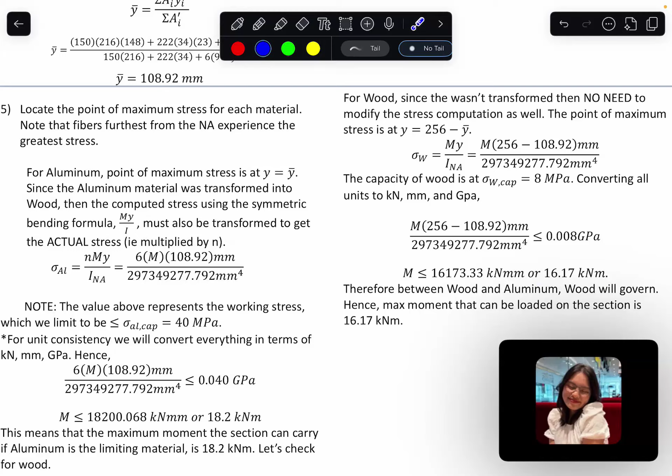Again, take whichever was the lesser of the two M values we computed, so we have 16.17 kilonewton-meters. This one's a bit challenging.

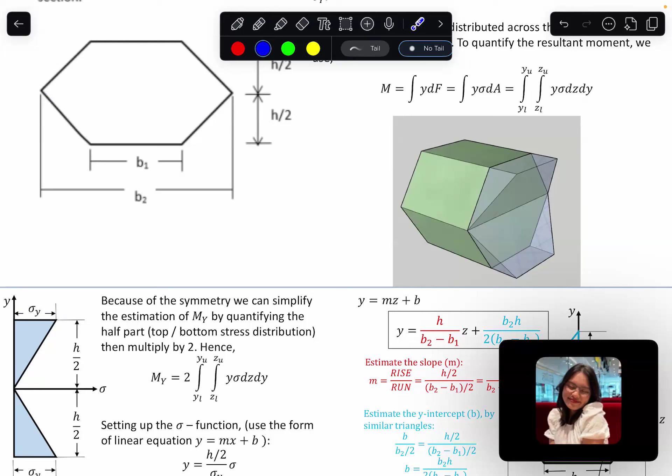So we have a function of sigma in terms of y - let's rearrange this. Sigma equals sigma y times y over h over 2.

And we'll be able to get the value of our sigma, and that's what we'll substitute into our equation. But don't forget, we need to get this too -

the manner in which the width decreases as you increase the value of y. So we need a bit of algebra here.

So you have y equals this, so we need the slope - rise over run. Since you've expressed it as a linear function, we have z upper and z lower - this z here and this z here.

So you have this and this, and that's what we'll use for this integration. So you have My equals that.

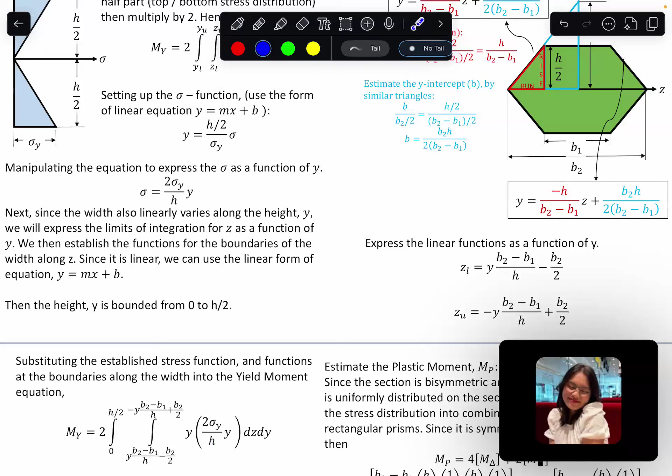It can come out there. So what we'll get is M sub y equals this value right here. So let's follow through using M equals y sigma dA. Y is if M is along z, so y is the perpendicular to z component. So that's what we used.

For MP, you have an assumption that everything is in yielding. So you just need to find the cutoff area where the area on top equals the area at the bottom - area under compression equals area under tension. So that's our horizontal cutoff line. And since it's doubly symmetrical, the one in the middle, the plastic neutral axis, divides it into two equal segments. All we need to do is determine what the first moment of area is for the top and the bottom.

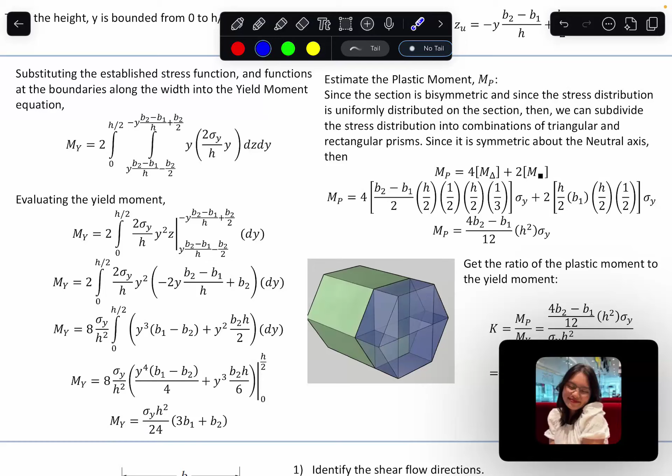Then multiply by sigma y to get M sub p. And when you do that, we'll have this value right here, in terms of B2, B1, H, and sigma y. Also in terms of sigma y, H, B1, and B2 - if we take the shape factor, sigma y cancels out, and what we're left with is a purely non-dimensional value for our shape factor, which turns out to be in terms of B2 and B1 only. So that's what our shape factor becomes.

So you can follow this through. You can test yourself with a known value, because this is tricky - there's B1 and B2. You can assign a value for B1, say equal to 150, and B2 is 280. And you can verify that when you plug that in, the K you get should match the K here.

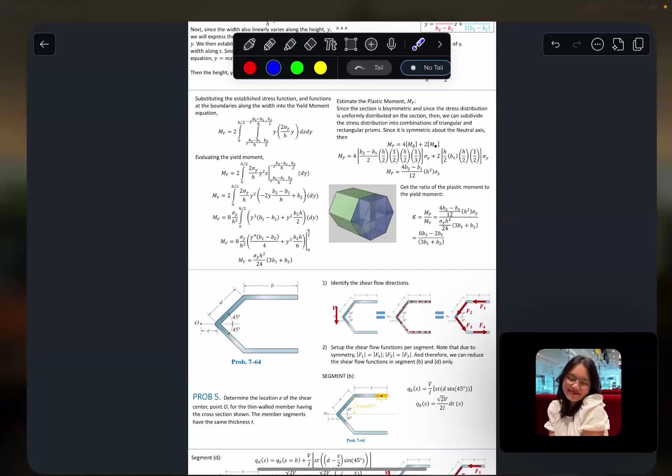So you have an open thin wall cross-section that is subjected to a shear force. What's being asked is where the shear center is. The shear center, again, is some eccentricity e at which if you apply your shear force there, there should be no rotation that occurs.

And in order to get there, you need to imagine again what the shear flow looks like running across your cross-section. Since this is vertical, our neutral axis is horizontal. This is a symmetrical cross-section, so we have no issue - it has an axis of symmetry here.

So here the shear flow becomes maximum, or our first moment of area - it maximizes here. And if you imagine what happens in our shear flow, if you trace it back, it's maximum here, and at the farthest points for both, the shear stress should go to zero.

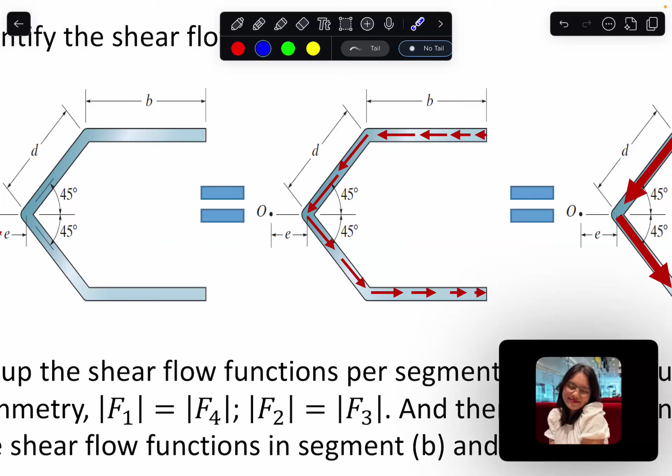So we do it per segment. We can start from segment B. If the thickness is given, and S is some distance, the only other parameter we need is the location of the centroid of your selected area given a value of S, and that equals D sine 45. So this D sine 45 is given.

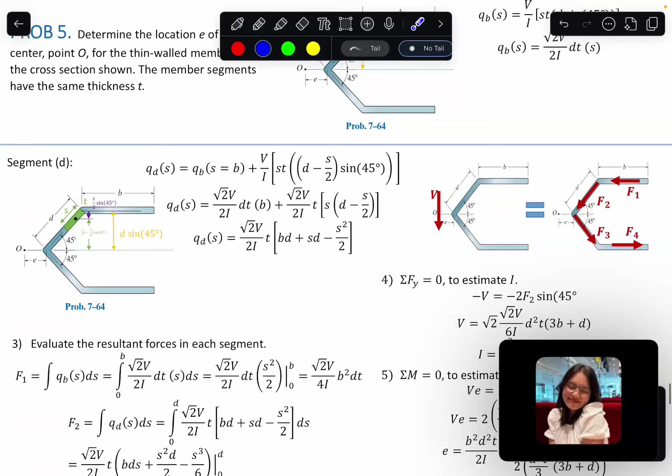So you have S times D as the area, and D times sine 45 as the location of the centroid. So we'll be able to get our shear flow as a function of S for this first segment, our segment B. Then for the segment along the incline D, you have to take note of the initial value passed from segment B.

So you need to evaluate what QB is when S equals B. When you do that, substitute B for S, and we'll have this value right here. We then evaluate the rest of the term - if you have a selected length S and a thickness T, then ST is the area. The centroid now changes - it's half of S, but inclined along the 45-degree line.

And binabawas siya dun sa D. So meron kang D minus S over 2. So meron kang resultant nito, yung distance na to. Tapos kukunin mo yung Y component niya.

So kailangan mo mag-multiply ng sine 45. And that right here is this term right here. So meron kang QD with respect to S, and we'll be able to get this part right here. But we take note of the notion ng symmetry.

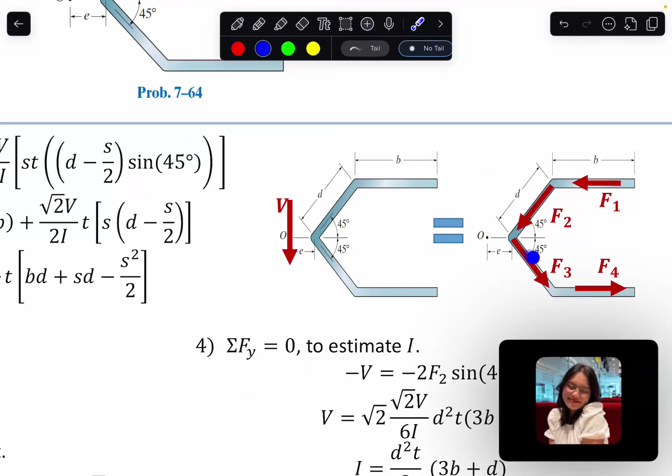Na if symmetrical, si F1 must be equal but opposite to F4. Si F2 equal in terms of magnitude kay F3. So kahit na kunin ko lang pala tong dalawang to, mare-represent ko na rin itong dalawang ito. And with that, I can proceed with evaluating ng resultant forces.

I integrate with respect sa length. So 0 to B, ito yung bounds natin. Tapos ito yung QB natin. So i-plug in lang natin, integrate lang natin. We have S squared over 2. Kapag in-integrate mo yung S with respect to DS, S squared over 2 evaluated from 0 to B, we'll be able to get F1 equals to this term right here.

We apply the same for F2. So substitute lang natin yung ating sa QD with respect to S, and integrate lang natin. So pag in-integrate mo, meron kang BDS, tapos meron kang S squared D over 2, meron kang minus S cubed over 6. Evaluate mo lang from 0 to D.

So wala yung sa 0, so 0, 0, 0 naman lahat to. So yung D, meron kang BD squared plus D cubed over 2, tapos meron kang D cube over 6. Combine mo lang ito at saka yung kalalabasan nito, so meron kang BD squared dito, tapos D cube over 3. And simplifying further, meron ka nito.

At pwede mong gamitin yung summation of forces along Y, kasi isipin mo lang paano nag-i-interact ngayon si shear force na vertical downwards with these forces right here. So pag nag-sum ka ng forces, wala namang contribution sa vertical. So ito lang yung may contribution along sa vertical. Kunin mo yung purely vertical na component nito, pati yung purely vertical na component nito.

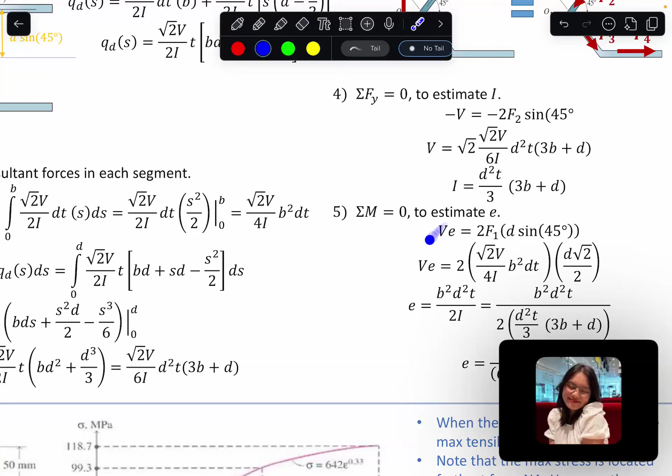Si F1 times D sine 45. Si F4 times D sine 45. So technically, ito lang dalawa yung in-equate natin. At si F1 is function ni V over I. Yung VE natin ay nandito. So makaka-cancel out lang yung V na terms dyan. I-substitute lang natin yung nakuha natin na value for I, and we'll be able to get an E that is only dependent on your geometry. So ito yung ating E.

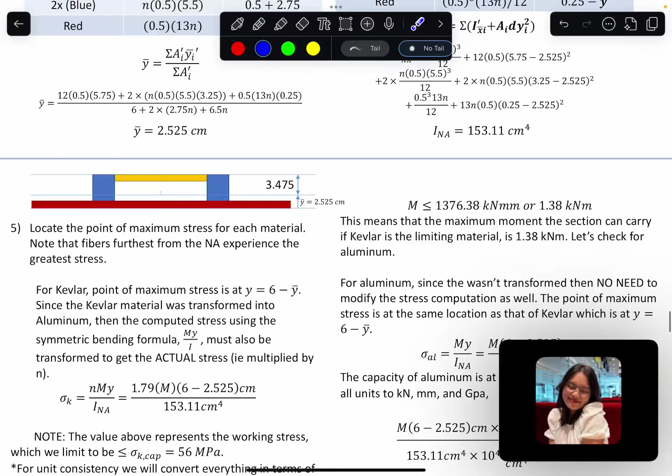And we can explore this. Siguro I'll simply upload this, but I would recommend you to practice more about reinforced concrete. So aralin niyo yung reinforced concrete. Magbibigay ako ng sample problem, magpapahabol ako dito. So yung mako-cover lang ng bibigay kong notes so far ay yung product of inertia, laws of transformation, unsymmetrical bending, inelastic bending, non-homogeneous cross-sections, at saka shear center.